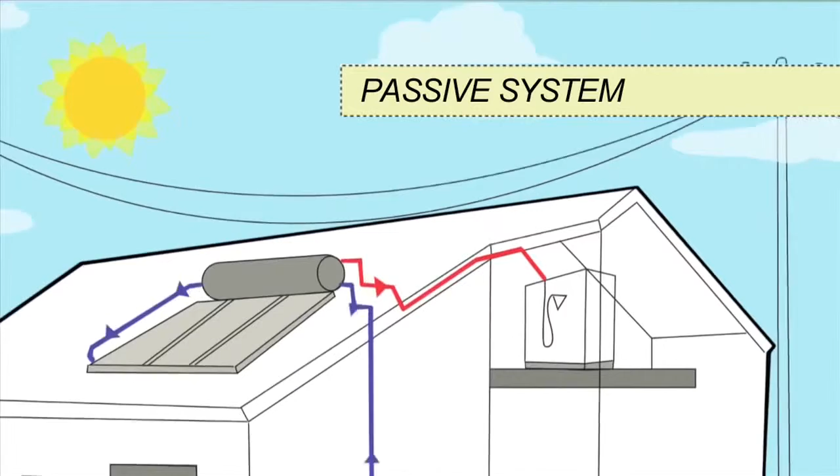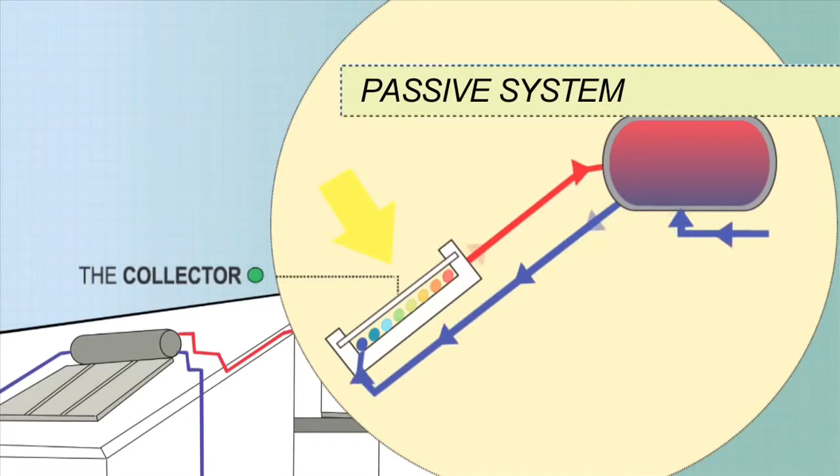In passive systems, also known as thermosiphon systems, the tank sits above the collectors. Colder water sinks into the collectors, whilst warmer water rises unassisted from the collectors into the tank. The tank may sit on the roof with the collector, a close coupled system, or within the roof cavity above the collector, a gravity feed system.

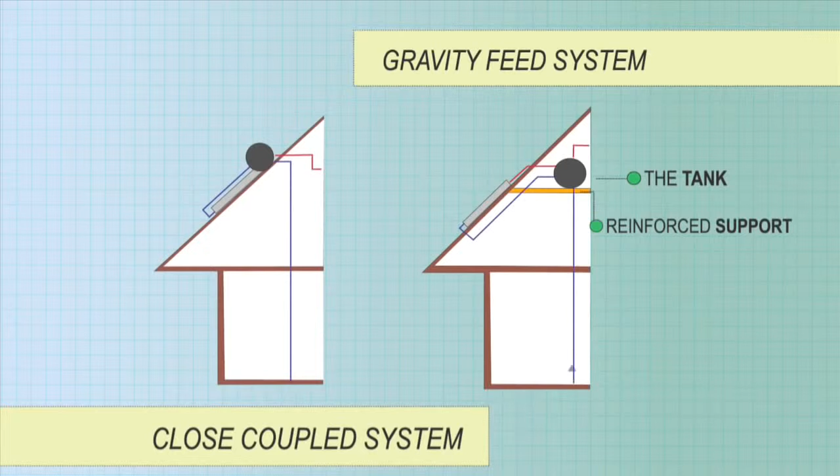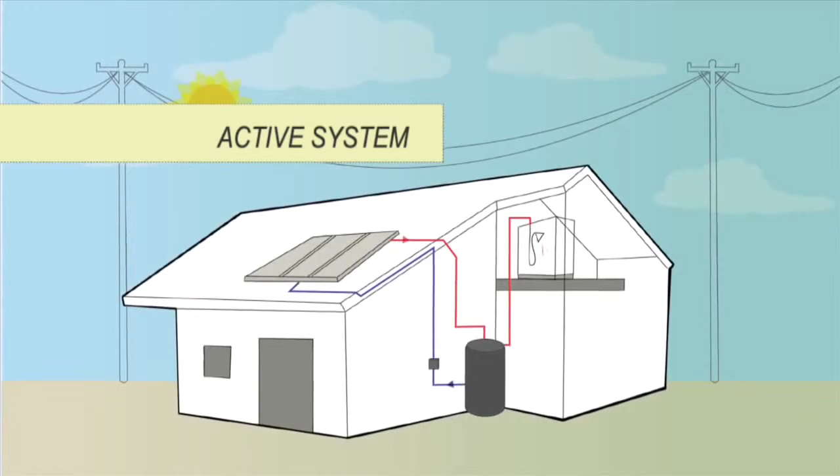With these systems, the roof support structures must be strong enough to handle weights of up to 800 kilograms. Active systems use a small pump to move water between the collectors and the tank. The location of the tank can be within the roof or on the ground.

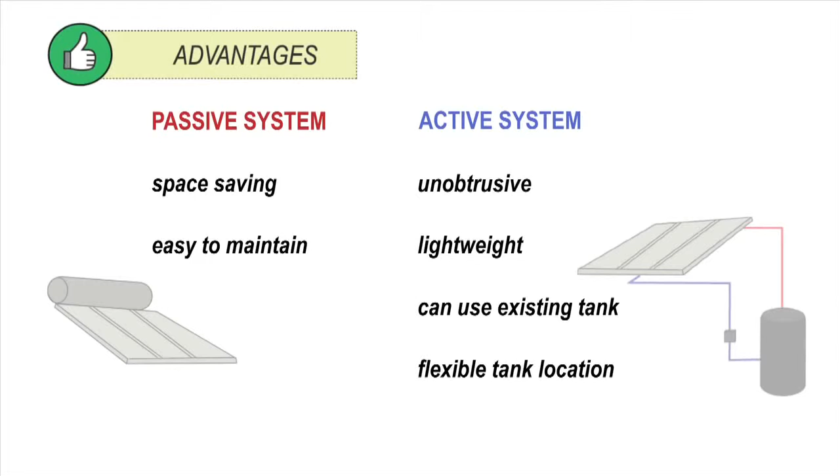Each type of system has advantages. A passive system is space-saving and is easy to maintain with no moving parts. An active system is unobtrusive, lightweight, can use an existing tank, and the tank can be located closer to where hot water is used, reducing heating loss in pipes, but the pump uses some energy.

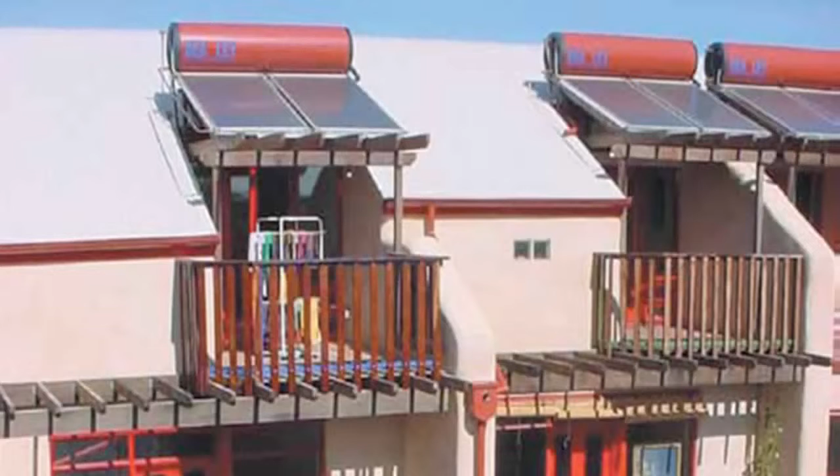There are two collector types to choose from: flat plate and evacuated tubes. Evacuated tubes have the advantage of receiving perpendicular radiation for a greater part of the day. This, combined with their vacuum insulation, means good winter performance. Flat plate collectors, particularly if purchased as part of a close coupled system, can be more affordable than evacuated tube collectors. However, the prices of evacuated tubes has fallen in recent years.

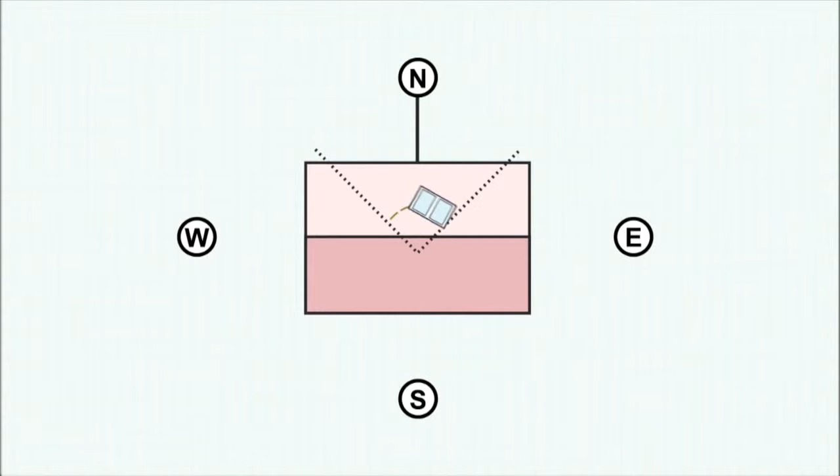Collectors should ideally face true north in a shade-free position. Facing the collectors 45 degrees from north will result in only minor reductions in performance. The ideal inclination is the angle of latitude plus 5 to 10 degrees. Sydney's latitude is 33.5 degrees, so an ideal angle of inclination would be around 40. However, plus or minus 15 degrees would still provide adequate performance.

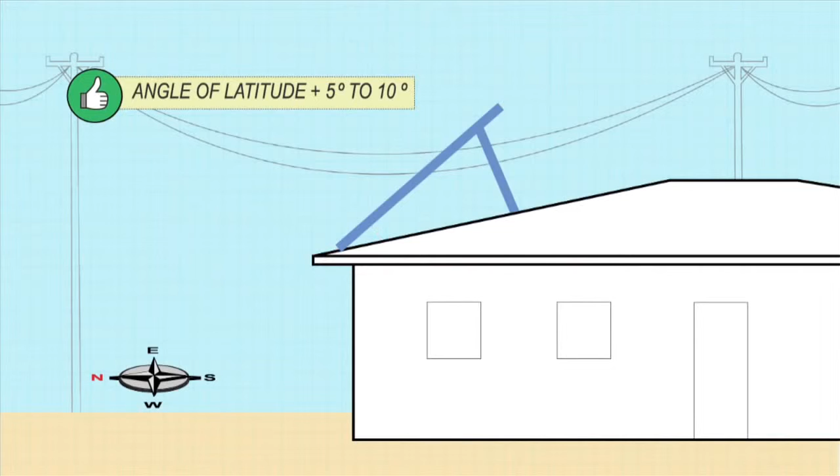If your collectors face due east or west, the lower the angle of inclination, the better. However, to allow thermosiphon flow, you must always keep the angle above 10 degrees.

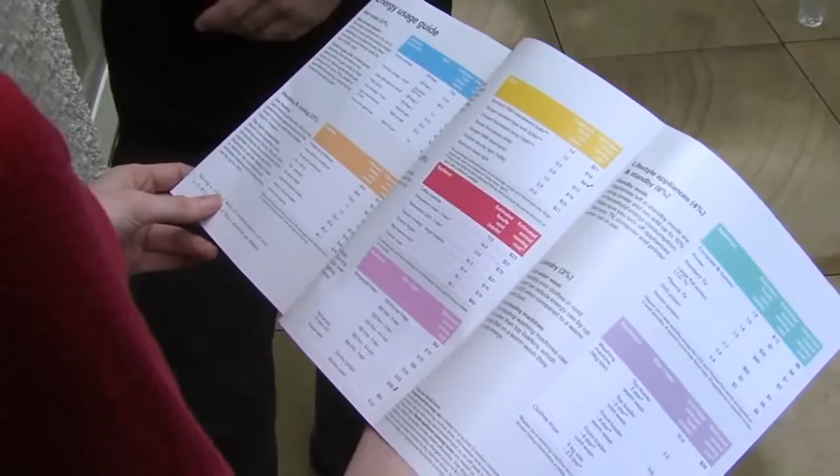For the correct sizing of your collectors and tank, consult manufacturer's guidelines to see what is best for the climate and household.

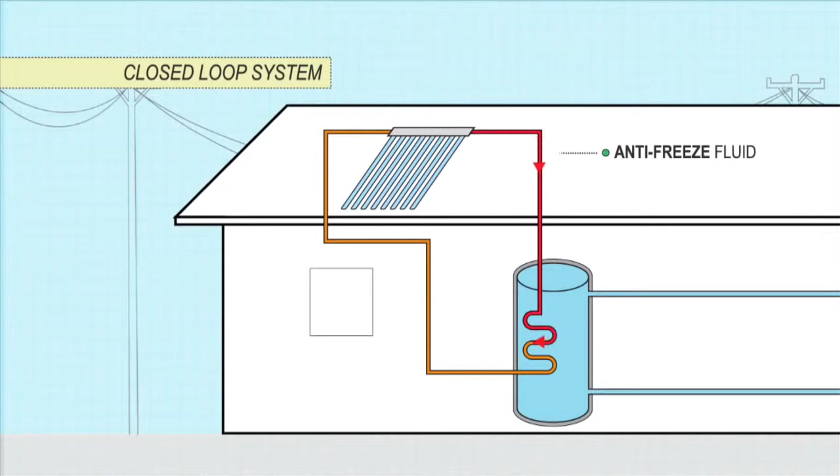In places with minor frosts, evacuated tubes may offer enough inbuilt protection. In climates with regular frosts, indirect or closed-loop systems are the most popular and reliable form of frost protection. Instead of water, an antifreeze fluid is heated in the collectors. The antifreeze passes heat onto the water via a heat exchanger. The antifreeze does not come into contact with the household water supply.

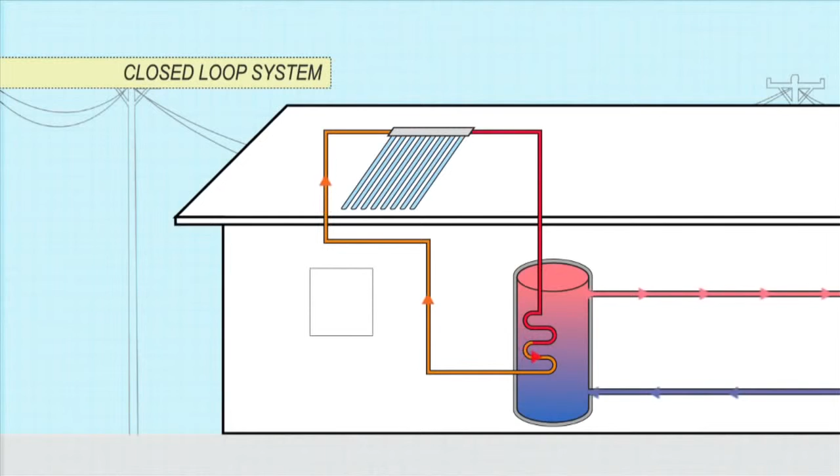Other frost protection methods are available, such as frost protection valves, temperature controlled pumps, and drainback systems.

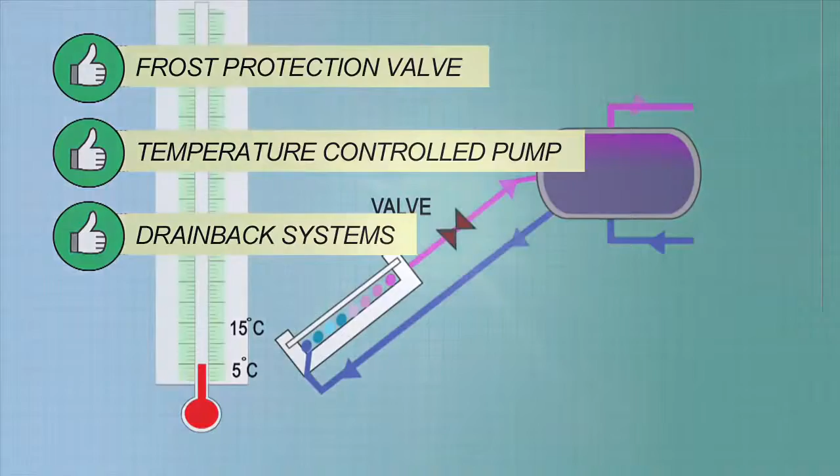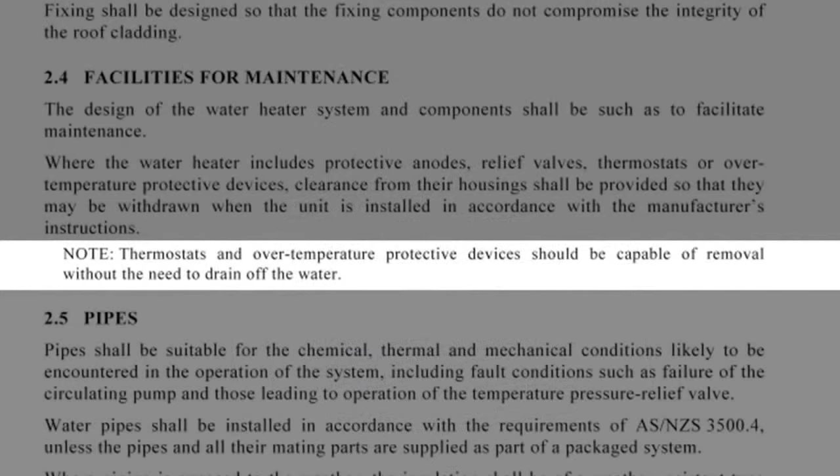In an Australian summer, water in collectors can easily approach boiling point. This can cause excessive pressure buildup and can damage the lining of vitreous enamel tanks. The Australian standards state that solar hot water systems must provide over-temperature protection without draining water, so a temperature pressure relief valve is not enough.

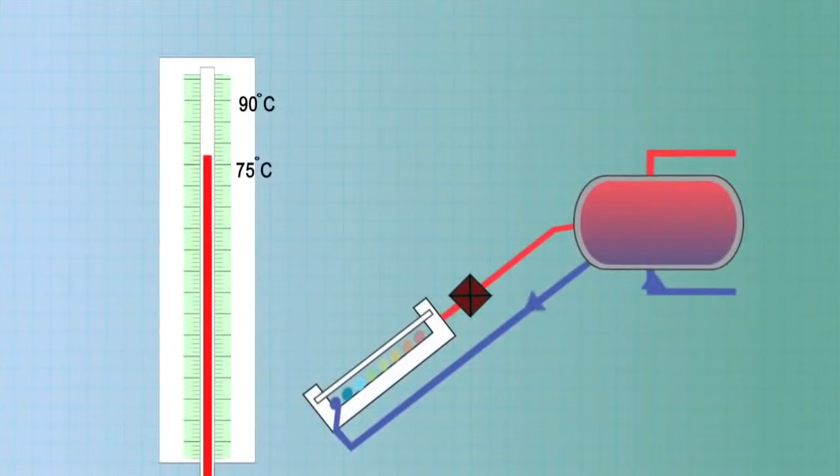The most common way to prevent overheating in the tank is by automatically stopping the circulation between collector and tank when the tank water gets too hot. This can be done using a solar control valve or a temperature-controlled pump. See the fact sheet on the Trade Secrets website for more information about how to control for frost and overheating.

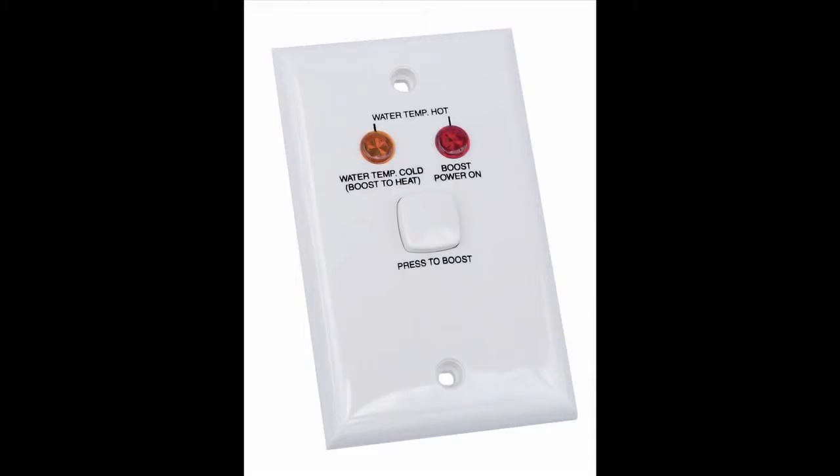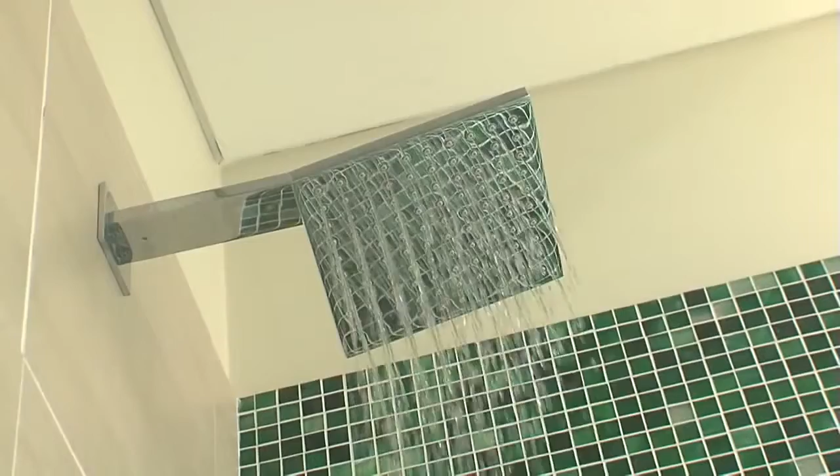The solar hot water system will require boosting at some times of the year. Electric boosters use a lot of power, so make sure the booster is controlled by a manual in-house switch. This switch should include a light to indicate when on. Boosters which have no in-house switch or are permanently on are wasteful, as they often heat water to 60 degrees, water which would otherwise be heated by the sun.

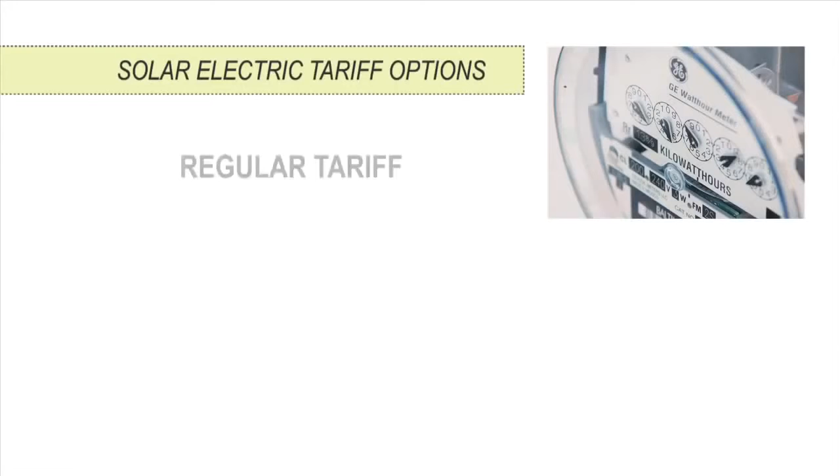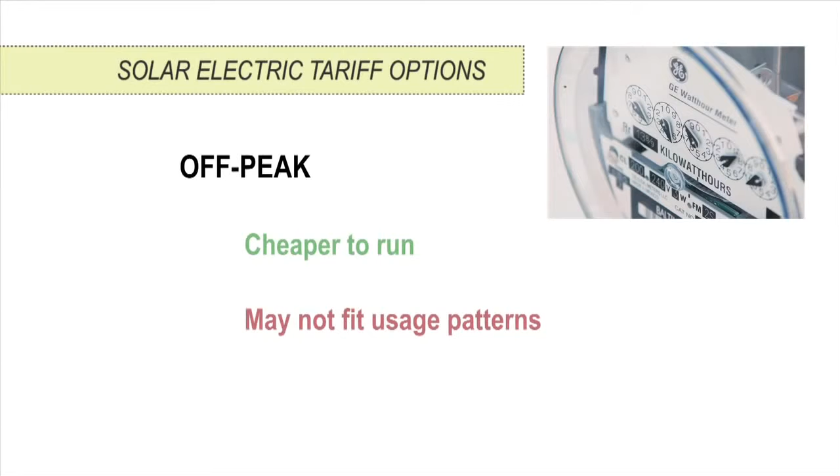When advising the householder on their energy tariff options, explain the pros and cons of each option. A regular tariff allows boosting at any time, but it won't lead to a reduction in their bills if their previous system was electric off-peak. Off-peak will be cheaper, but may not fit the hot water usage patterns of all households. If available, extended off-peak or off-peak 2 is often a good compromise.

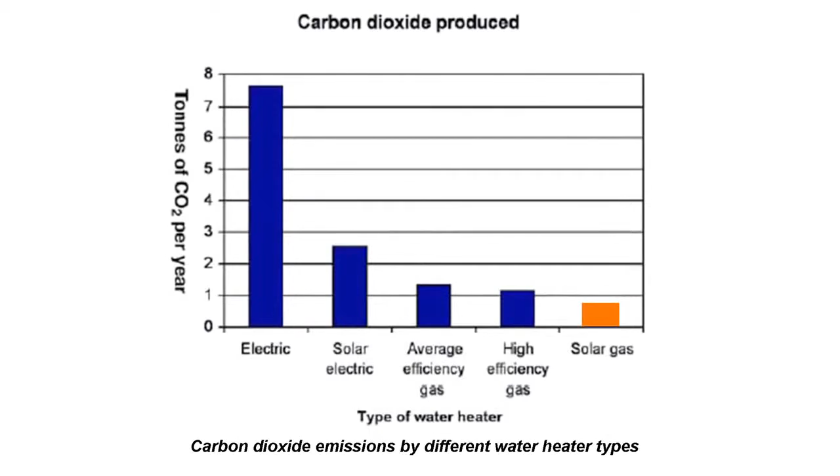Natural gas boosters have the advantage of lower emissions and running costs compared to electric boosters, and also aren't subject to time of use restrictions. Install a timer on gas storage boosters to ensure the gas does not heat water which would otherwise be heated by the sun.

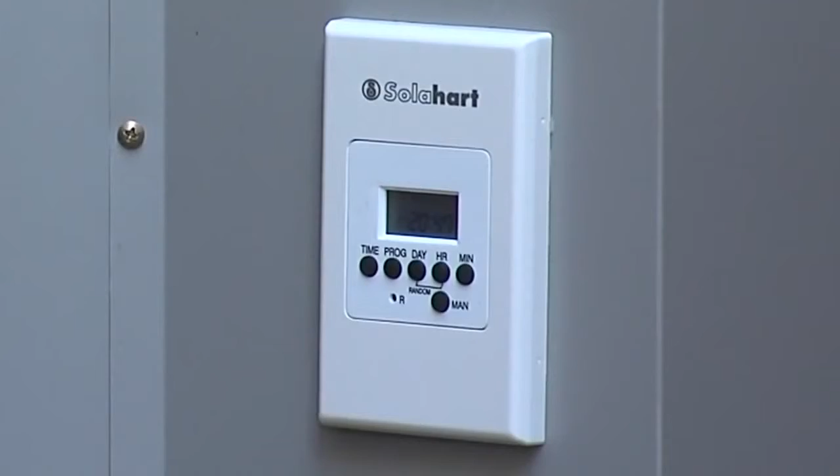So, select the system for the climate and use appropriate temperature controls, locate the collector and tank to maximise performance, install a manual boost switch, and connect to a tariff which minimises emissions and costs.